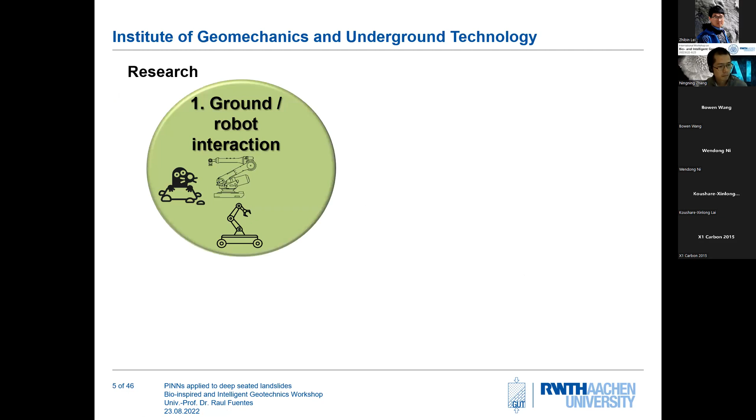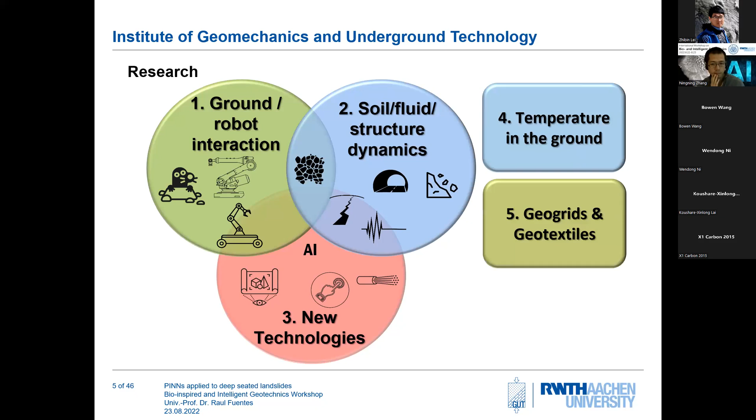One of the main ones is ground-robot interaction. We're also working in soil fluid structure dynamics, new technologies, particularly AI, PINNs, what we're going to talk about today, but also sensor technology, temperature in the ground. What I call temperature in the ground, I mean frozen soils and geothermal, geogrid and geotextiles, and we also do a lot of work on rock mechanics. Okay, so just a little bit so you get to know us a little bit more.

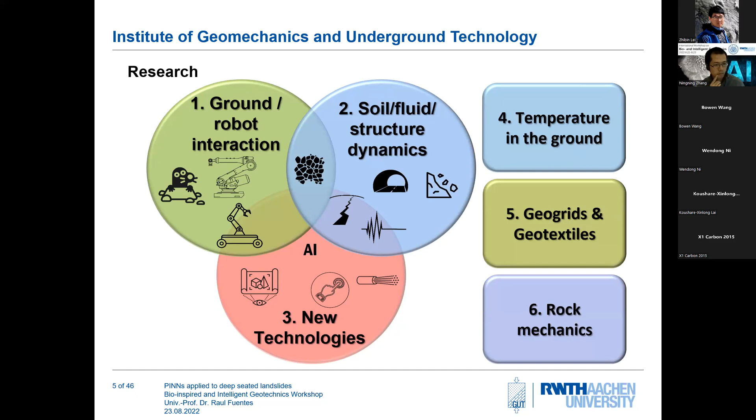Let's start with the landslides. So the type of landslides that we are talking about are deep-seated landslides, typically where you are reactivating an existing or historical landslide. They have a peculiarity that they all have a shear band, which has been actually created in the past, like I said, or was existing through the geology, and this is where the failure mechanism happens. What you can see here is Vajont in Italy. That is a very well-known case study that has been used multiple times in the literature to study landslides and also run-out distances, mechanisms, etc.

You can see here that this was a very large landslide, and it was monitored significantly because it was in the sides of a newly built reservoir. And when they started to fill it up, they saw that the landslide was activating, it was moving. So they installed a lot of monitoring, and then they started to see what was happening, filling it up, reducing the level, etc., until it tragically collapsed.

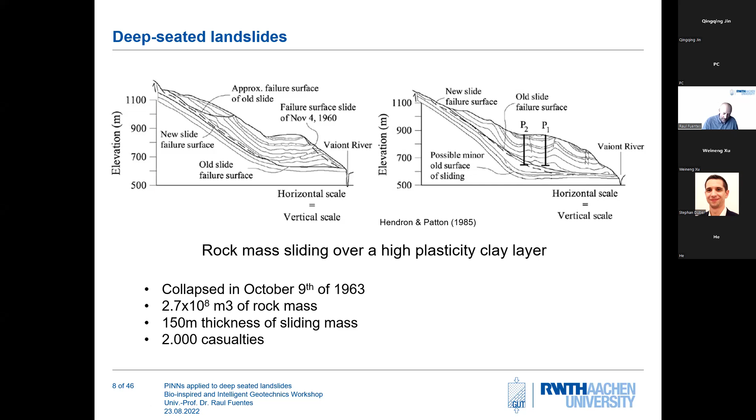And this is what I wanted to show you. So this is the geology, more or less. You don't have to look at the details. The most important detail here is this thin shear band where the failure mechanism happened. And that was a new slide that was activated along or very close to the old slide failure surface. It collapsed on this date, and it mobilized 270 million cubic meters of rock mass with a thickness of 150 meters. And unfortunately, it caused 2,000 deaths because it created a tsunami that overtopped the reservoir, and then it flushed downstream, hitting a nearby village, where a lot of lives were lost.

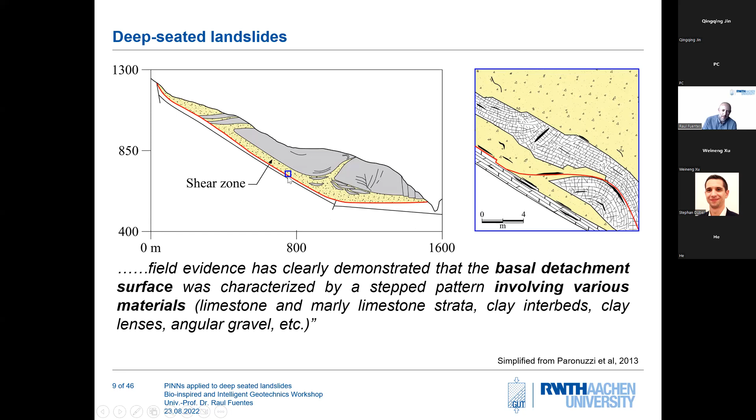So here you can see some of the features of this landslide along the shear zone and where this shear band happened. I'm not going to go into this here. You can read it later if you want when you look at the presentation again. But remember, we're looking at these thin shear bands.

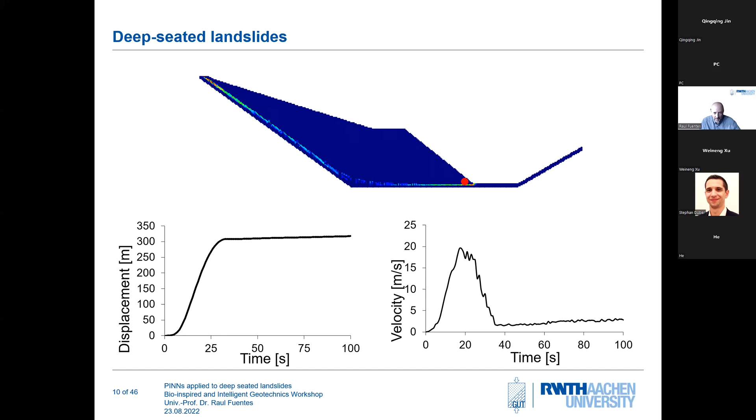And then when they started to study, and this was one of the seminal papers from Professor Vardoulakis, they started to see how these landslides, and this is a feature of all of these types of landslides, kind of go slowly. They start moving slowly, slowly, slowly. This was what they think could have been the original. And then they accelerate super quickly and reach these high velocities that I showed earlier. This is a typical feature of this type of landslide.

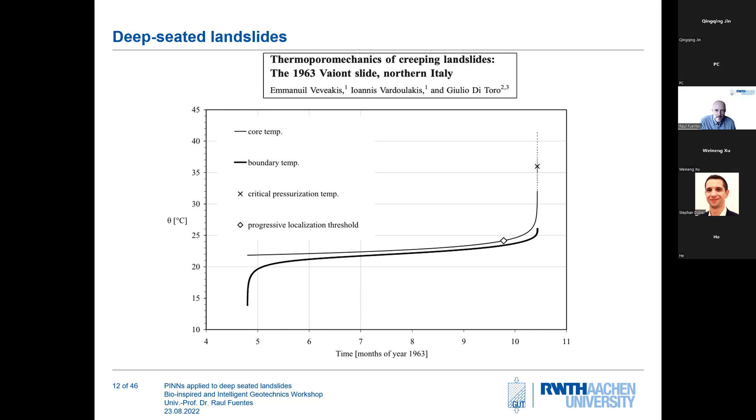And what Professor Vardoulakis and co realized is that this also was related to an increase in temperature because of the friction, of course, and that this increase in temperature changed the strength of the material. In this case, the shear band was composed of some clay material, which increased the pore water pressures, which reduced the effective stresses. It becomes like a self-feeding mechanism in which the more quickly it slides, the more temperature it generates, the more it reduces the strength, and the more the slide accelerates. So this is kind of the mechanism.

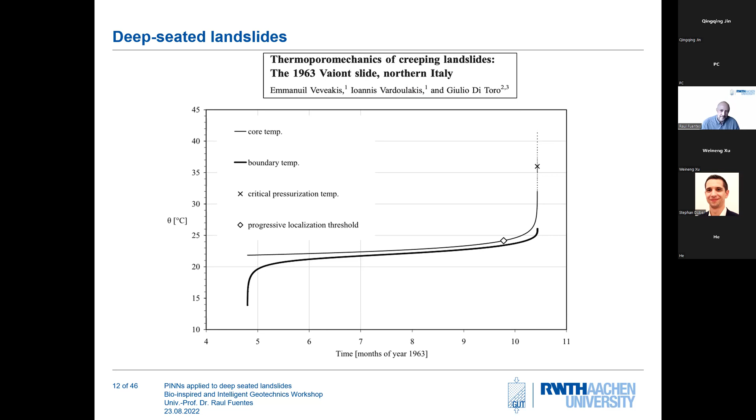A little bit of MPM modeling to show what was happening. So they started to fill the reservoir on this side, and this reduced the effective stresses enough on what was already a very low factor of safety, if we want to talk in terms of factor of safety, that it then triggered the landslide. And remember, this is a self-feeding mechanism. Once it starts sliding, it increases temperature, reduces shear strength, and the whole thing accelerates.

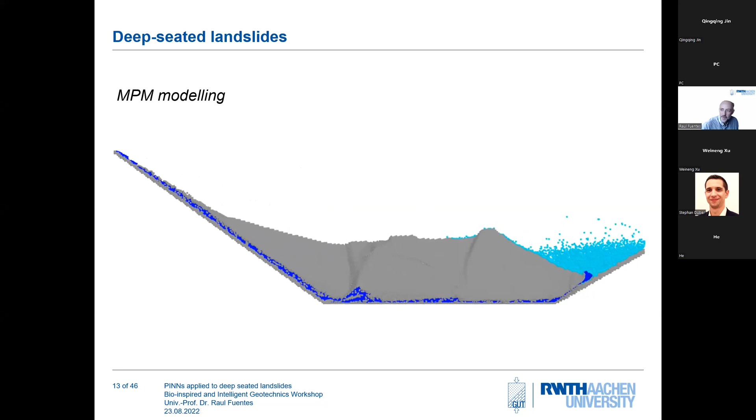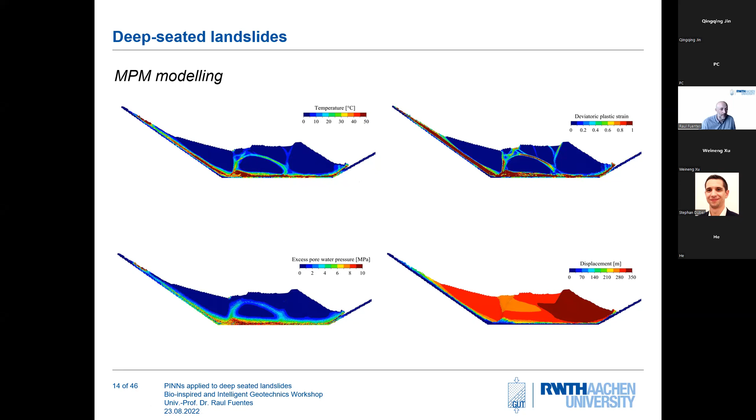So you can see some of the displacements, and this was able to model very nicely the landslide, and some of the other features and the temperatures that were reached here. So temperatures of about 50 degrees along the shear band. This is the important bit: there's a shear band and there is temperature that is created. Why? Because if this is the case, and temperature could help us understand that things are accelerating, then if we monitor it, we could potentially predict the occurrence of these events. And this is what we are going to try to do here today.

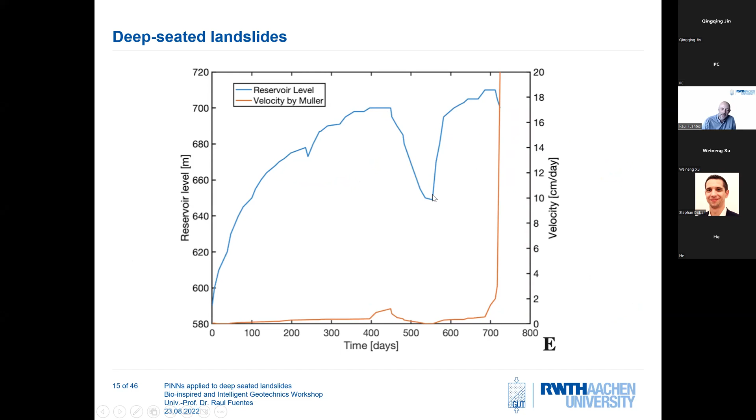Just another slide showing the very quick acceleration of the landslide once it reached a certain level and it failed. And this was, of course, related to the filling and reduction of the reservoir level. But this was just one case study. There's two other case studies that I'm going to very quickly introduce that are very similar in features, different volumes, different geologies, different depths of mobilized material, but sharing this feature that there is a pre-existing or potentially pre-existing failure surface with a thin shear band that causes this to happen.

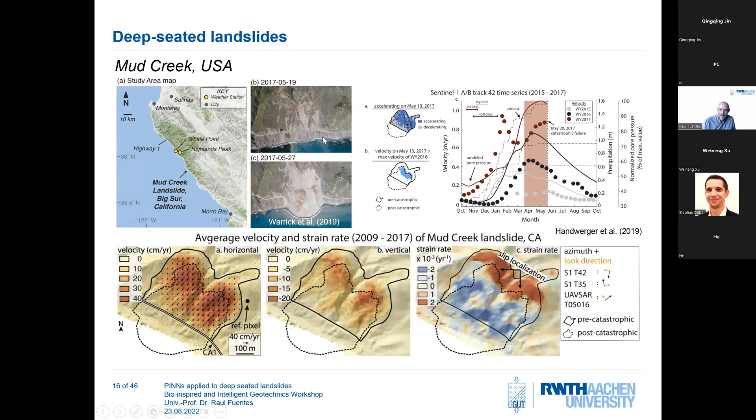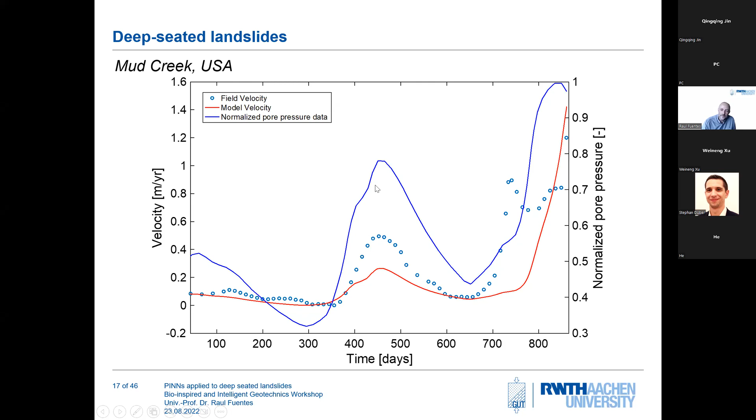And this is the example of Mud Creek in California. You can read more here, but what happened here was very similar to what happened in Vaiont. So this is an analysis. There were measurements in Mud Creek, but you can see the velocity of the landslide, how it shoots out very quickly and high up when it fails. Okay. So very rapid landslides once they get mobilized.

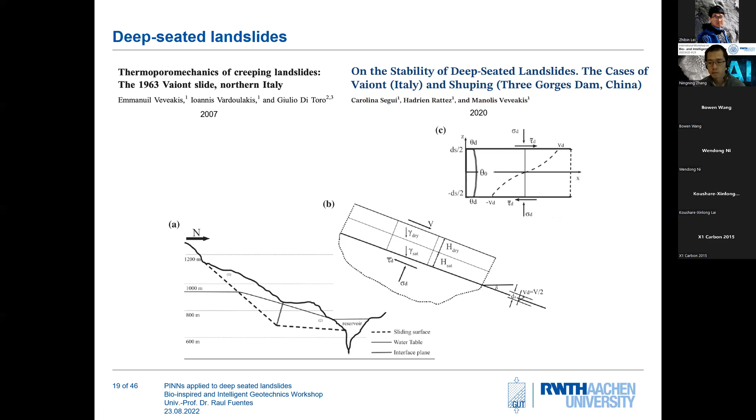I don't have time to go through all the details, but eventually, if you go through the development of this model, what you come out with is this partial differential equation, in which you have temperature, non-dimensionalized theta, time, and the thickness of the landslides, and then critically what is called the Gruntfest number.

This Gruntfest number is a bifurcation parameter that they stipulated, they presented, and what they realized is that when this Gruntfest number reaches values of around 0.88, the landslide fails, and then it goes into an unstoppable mechanism in which you cannot stop it anymore. So critically, if you can calculate the Gruntfest number of these landslides, then you can predict or see whether it is close to failure or not.

And of course, this is related also to temperature, to this theta here. You may be thinking, why are we going to use neural networks to solve this equation that doesn't seem particularly difficult? It is very difficult because this is a difficult number that includes a lot of other parameters here, the shear stress, thickness of the landslide, and others that can potentially change as well during the development of the physical mechanism, and of course M, which also depends on temperature, like you can see here.

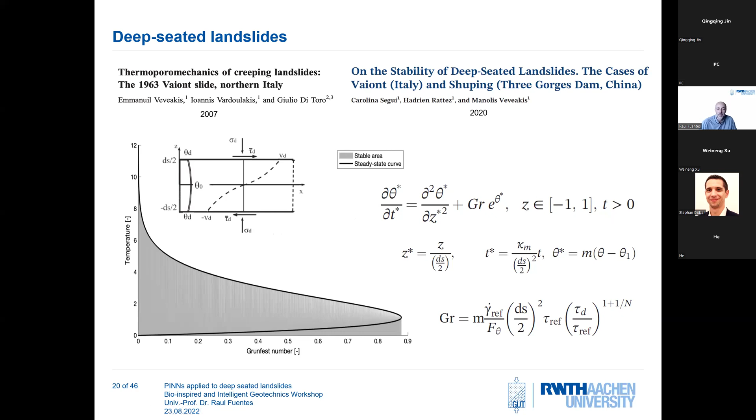So it's not straightforward to solve, and this is why we also thought that maybe neural networks can help us solve this problem. So in summary, we have 3 case studies. These are the characteristics: large volumes of material mobilized, varying thicknesses, with different potential causes or activation mechanisms. So what we're going to see essentially covers various conditions.

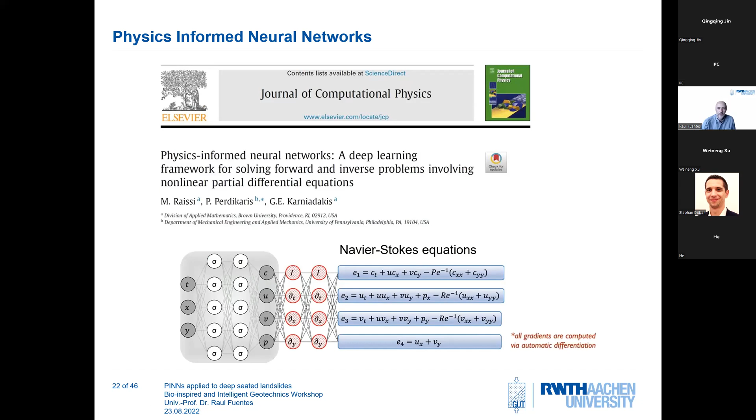Now, let's go to PINNs, Physics-Informed Neural Networks. And this is probably one of the seminal papers on this, which was done by Professor Karniadakis at Brown University and company. And essentially, what you want to do is solve these partial differential equations using neural networks. So typically, these PDEs you can solve with other numerical approaches, boundary value problems. But in this case, what we're trying to do is use neural networks.

That's one implementation. The implementation that we're using is the one done by Ehsan Haghighat and Ruben Juanes from MIT, who actually are working with us on this topic, not in landslides, but on something different, using PINNs. And this is a very convenient implementation because it's using TensorFlow and Keras. It's all open source, and you can access it whenever you want, and it's a very nice framework.

Right, how does this work? Well, in typical neural networks, what you have is an input and an output. An input is approached through a number of weights and biases that are multiplying each number of neurons that are in each of these layers. So what you can see here is the hidden layers of a neural network. And then what you want to do, of course, is from these inputs, calculate the outputs. And typically, you will measure the error, compare these two, and keep iterating until your error reaches a certain tolerance of what you would like to achieve.

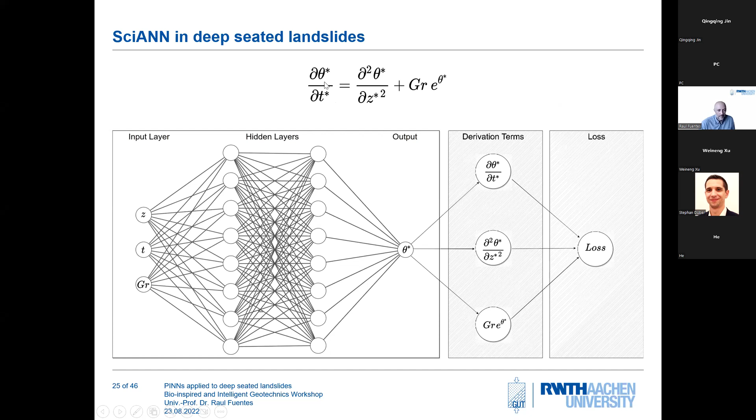What are we doing with PINNs? With PINNs, we are doing the same, but now we are including the partial differential equation in the loss function. So when we calculate the error, we don't only calculate the input to output difference, but we also estimate the partial differential equations. And this is where we introduce the physics. So we are not only using data, we are introducing the physics of the problem, minimizing our estimates to predict this PDE. And this is in a nutshell, more or less how it works.

So this is what we did, of course. We introduced the PDE here in the mean square error. So every time you do an epoch, an iteration, you calculate your loss function here, which could be only data, it could be only the PDEs. There are different approaches, it doesn't matter now. And then with a certain algorithm, you keep updating your parameters, and they get an activation function, which I'm going to talk about very briefly. And then you backpropagate to start again, going through the network, trying to create better approximations.

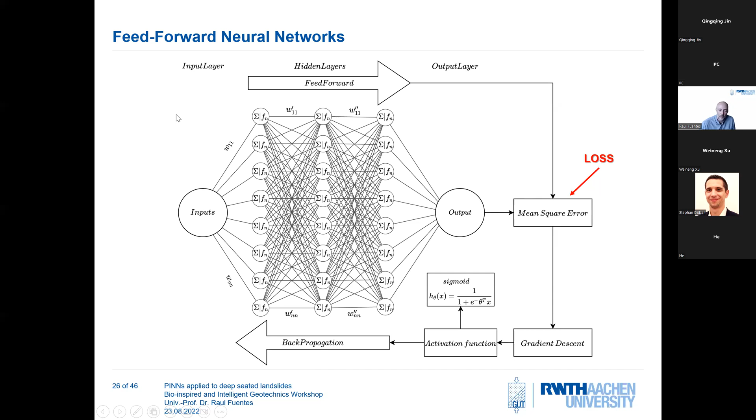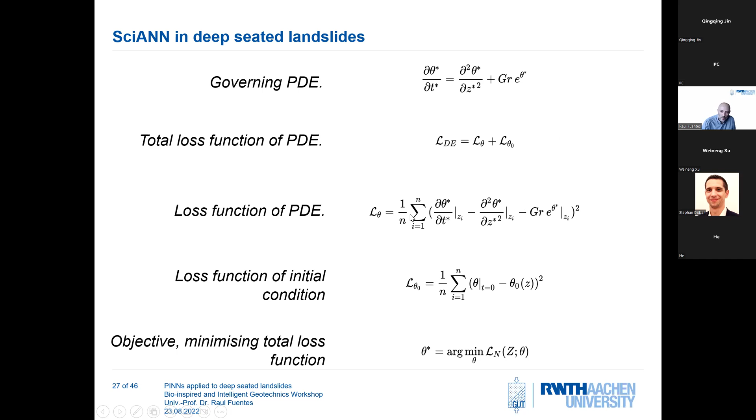So the end of the problem is this: we have a governing equation, a loss function that is defined in this case by the loss of the differential equation and the initial condition. We don't have boundary conditions in this case. In some cases, you will have boundary conditions here, and they will be incorporated into the total loss function of the PDE. This is calculated in a very similar way. So you do the estimate, and then you compare it to what you're getting, and the initial condition the same, and then you estimate it.

Okay, so what results did we get? So first, I wanted to point out the importance of normalizing the values. And this happens for most of the problems that you will ever try to solve using PINNs, especially when you have variables, input parameters or output parameters that have very different numbers.

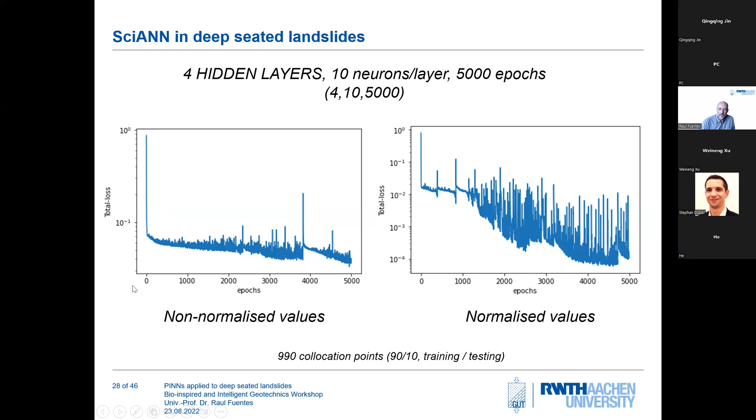So numbers, typically when you have permeabilities 10 to the -8, or other parameters that are in very wide ranges, this introduces problems also numerically in traditional numerical models, but very importantly here in PINNs, introduces significant problems, and you need to normalize all of your data. This is very important, and we realized that very early on, and we were able to then train the network a little bit better.

And you can see here some of the differences you can get from training in the same case. We are training now in one of the cases and comparing in the same case just to test the effect of non-normalized values versus normalized values. And you can see clearly here what the effect is. Yeah, right. So that's just a little thing to understand.

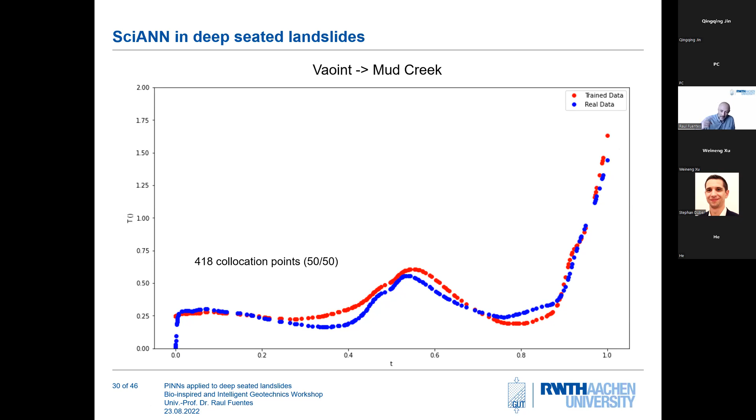And then what we started to do is try to train on different cases and test on other cases. So Vaiont and Mud Creek, they share some similar features. So we used the data of Vaiont to train the PDE and the network, and we tested on Mud Creek, and we got reasonable results like what you can see here. But these are similar landslides in the sense that they both failed. So they had this ramp, and therefore they share common features, while also the cycles that we were using to train are very similar.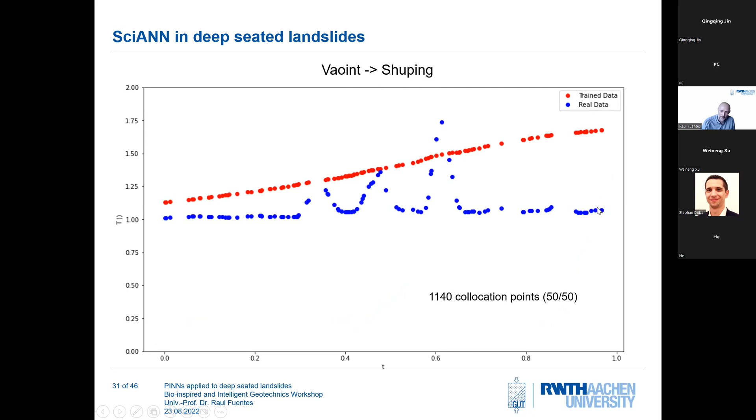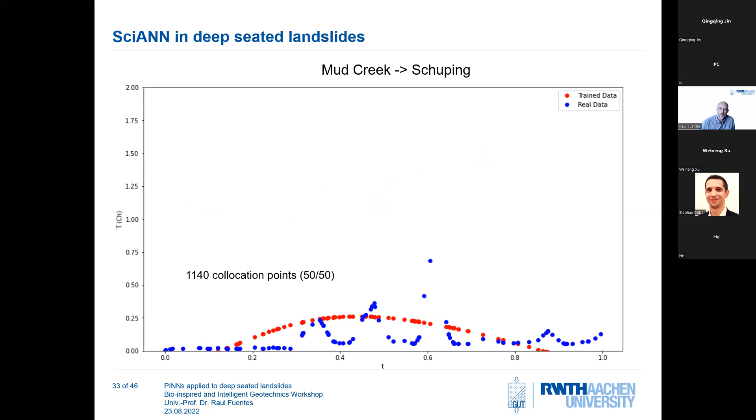By the way, this is temperature here on the left, and this is time on the x-axis. However, when you train on Vaiont and test on Shuping, which is a landslide that has not failed, and what you can see here is the real data of Shuping, then the results are catastrophic. Yeah, it doesn't work. We did a number of combinations. So MudCreek and Vaiont were good friends. They always compare well, but every time you include Shuping, the thing didn't work.

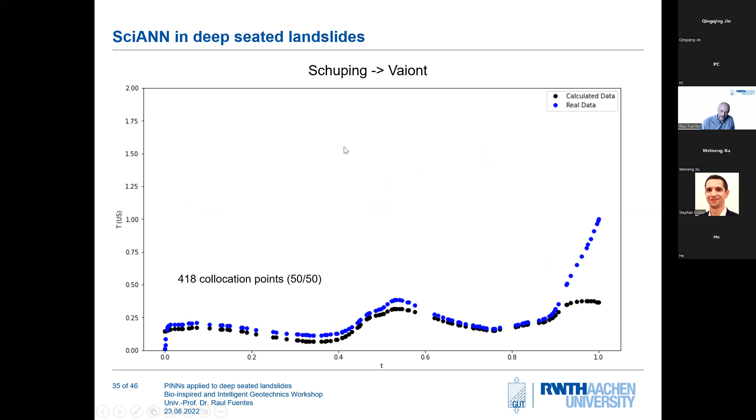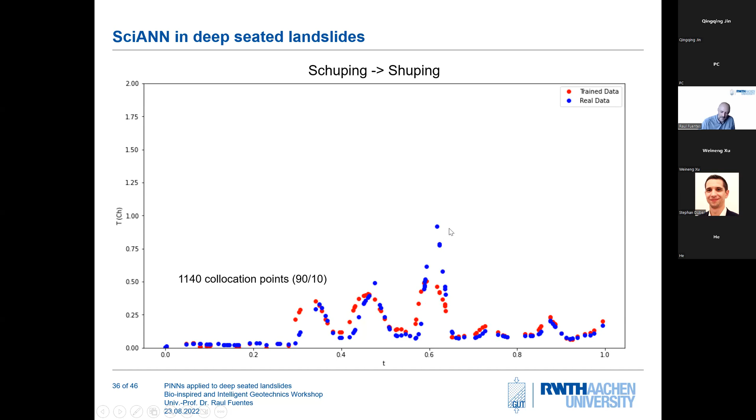Even including Shuping as the training and testing on Vaiont or MudCreek, of course, Shuping does not have this shooting up stage, and therefore it was not capturing that very well, neither in Vaiont nor in MudCreek. So we then realized that we needed something else. Even training on Shuping and testing on the Shuping landslide was not enough. Then we also tried different combinations, so training on 2 landslides and testing on the 3rd, and this also did not yield good results, especially when we were considering Shuping, like for instance what you can see here in the testing. So we needed something else.

What did we do? We used synthetic data. So we created our own synthetic data, and this was approached numerically from a paper from Veveakis and Vardoulakis in 2007 or 8, I can't remember. So we created our own Gruntfest number as a function of time using this equation, in which C dictates more or less the number of cycles that you get, which in this case could be seasons with different precipitations, and then this will create this kind of wavy profile.

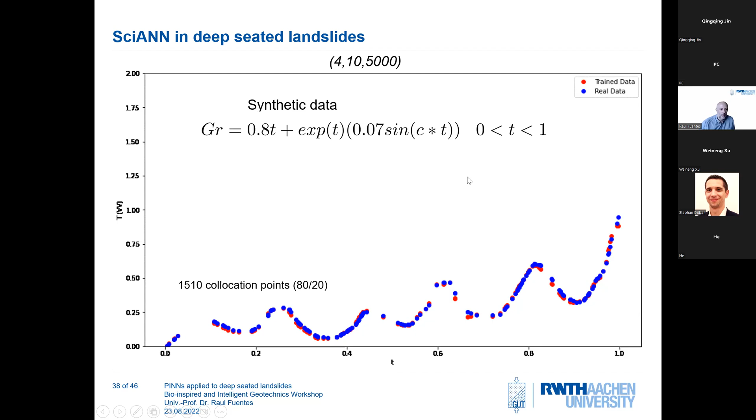And when we did this, we trained and tested on the data, and we started to get better results. But then, of course, what we wanted to do is see how it worked on the real case studies. And for information, as activation function, we use a hyperbolic tangent. If you're not familiar with these types of PINNs approaches, it may be worth telling you that it is good to use an activation function that is derivable at the same order of your PDE. Otherwise, it can also cause problems. So if you have a second order derivative, you should use an activation function that has a second derivative as well.

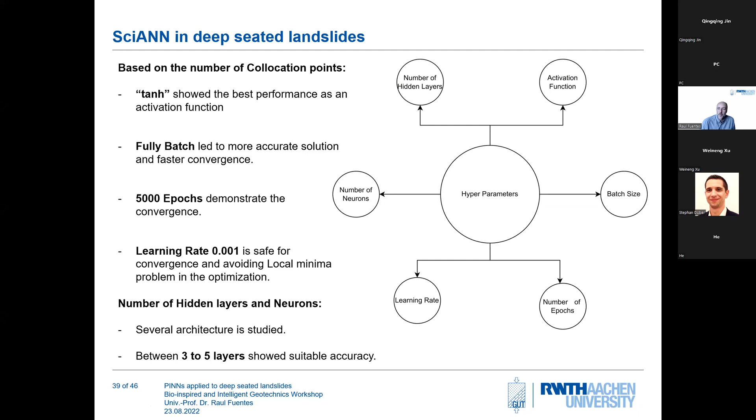In this case, we use a full batch approach as well, 5,000 epochs. And these are some of the hyperparameters that we fine-tuned by eye, essentially, so trial and error with this learning rate. And then what was critical, and this is a question that arises when you use neural networks in general, but also in PINNs, is how many layers and how many neurons you use. And we faced the same question as everybody else, because there's no theoretical approach to this, and in general it's done by trial and error. So we tried to come up with a more systematic way of estimating what number of layers and neurons we were going to use.

Well, this is just to show that it started to train very well. So we reached two types of architectures, with 3 layers and 20 neurons, and 4 layers and 16 neurons, that were giving us very good training for both the PDE, but also for the temperature and the total, which is, of course, the addition of both.

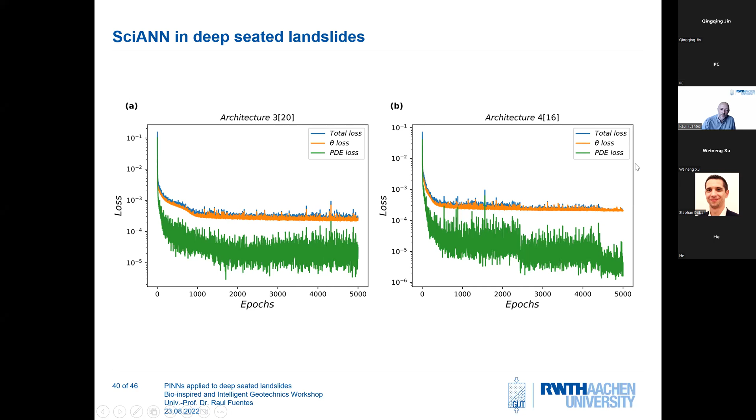And if it's 4 and 10, then this is the standard deviation. No, you don't know in advance, or at least we don't know. If somebody knows how to estimate that, please let us know. We didn't know, but this is, of course, something that you don't want. You want a very robust architecture that gives you low or high confidence bounds.

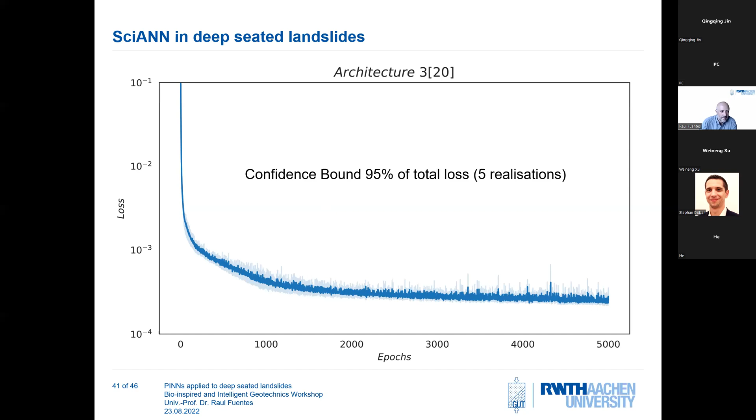And based on this and everything else, what we did is come up with this scheme in which, of course, we want to minimize the absolute error that we're getting. So we want to increase the accuracy. But we also want to have a very stable architecture that produces the same results every time, so the standard deviation of what I show you is also very low. And then, of course, what we were also doing, and you always have to do, is make sure that your network is not overfitting. So we tested that.